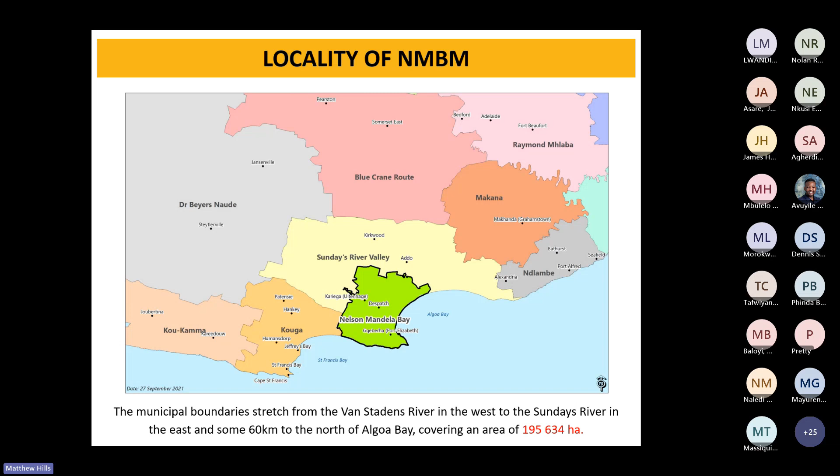Now, looking at PE in particular, we are located near the tail of the Swartkops River, so between Sundays and Gamtoos at the bottom of the screen there. And our water sources, especially our surface water sources, are located to our west. Those are the catchments that we really tap into, the Krom being an important one as well. And what's interesting about PE in particular is it's not just our local water sources that we tap into.

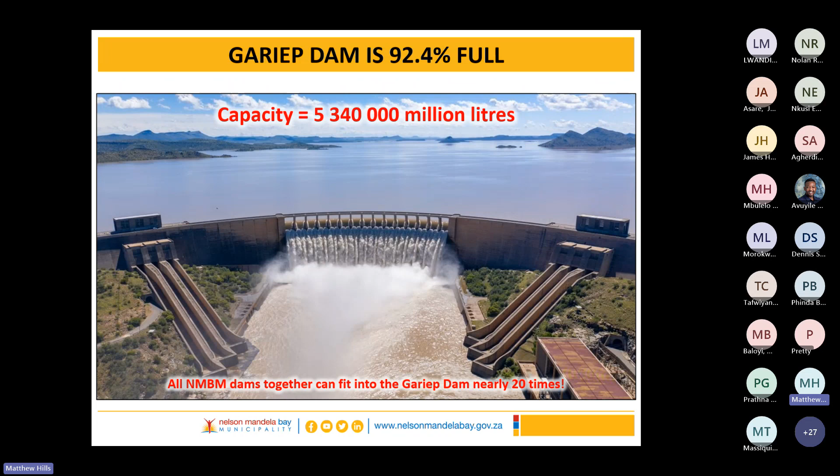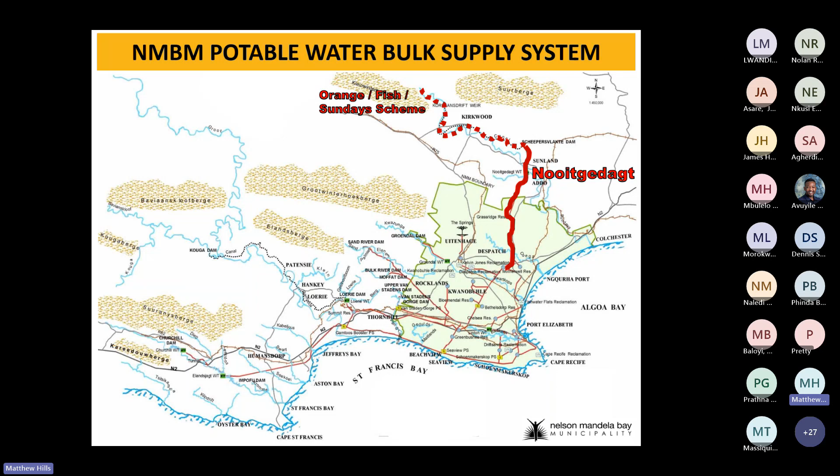So let's talk about the sort of water supply system on a bulk level for the metro. So we've talked at length about the Orange Fish Sunday scheme, and it's at our Nooitgedagt water treatment works, which has also been in the news quite a lot, that about 70% of our water comes into the city during a drought period. The rest of the sources we consider local. So the first is our Sand and Bulk River dams. These are old dams dating back to the 1930s. They were the first large supply dams to the city.

We then have the Groendal Dam, which is just north of Kariega, and its main supply. We then have the Krom system, which includes our Churchill and Impofu dams. That's the largest supply scheme that's dedicated to the NMBM. And then we have the Kouga-Loerie system. The Kouga is the largest dam within our region, but we share that water with the Gamtoos Irrigation Board, a conglomerate of farmers to the west of the NMBM.

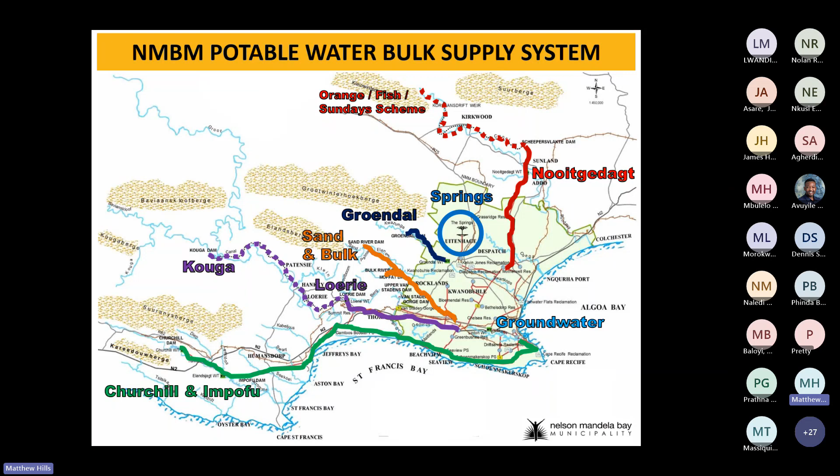We do have access to a spring just north of the town of Kariega. It's actually why the town developed in the first place. It's quite a reliable spring, but its volume's minuscule in comparison to the rest. And most recently, one of my primary projects has been to diversify us into additional groundwater as being part of the supply to the system. So this is at a very high level what it looks like. It's a tremendously interconnected system. So the focal point that I put in was to try and be able to supply areas with multiple sources of water, should one be stressed, we could get from elsewhere. And I will elaborate more on that in this presentation.

So let's focus in on the local dams. These are their capacities. You can see the ones on the right that we own are our small older dams. And most importantly, you can see our biggest by far, the Kouga and Impofu dams, make up most of the storage for our zone. In fact, that makes up 81% of the storage in our supply system. So it's those two dams that when we talk levels and capacities that you really must keep an eye on because they play a huge part in the resilience of our system.

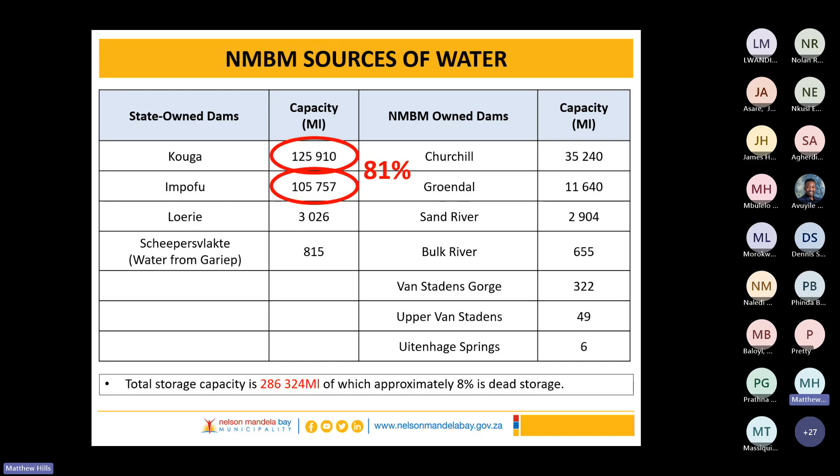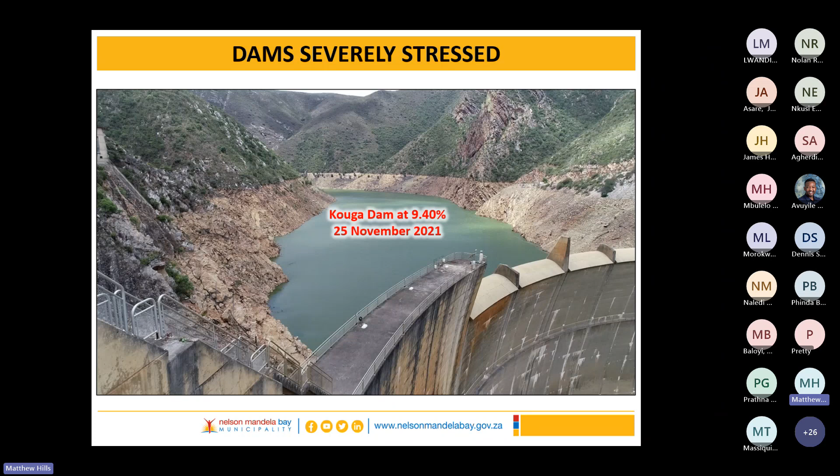Let's see some photos. So we're very lucky at the NMBM. We purchased a drone as survey equipment, and I get the joy of flying it every now and then because I believe a picture tells so much more than a graph with a line across it. So this was Kouga Dam towards the end of 2021. In fact, this got down to 4% in capacity. It was incredible. We haven't seen those levels, especially in the short duration history I've been at the Metro. The Loerie Dam downstream is just a balancing dam, but to see the intake tower exposed was something new for us as well. It offered an opportunity for maintenance, which was great.

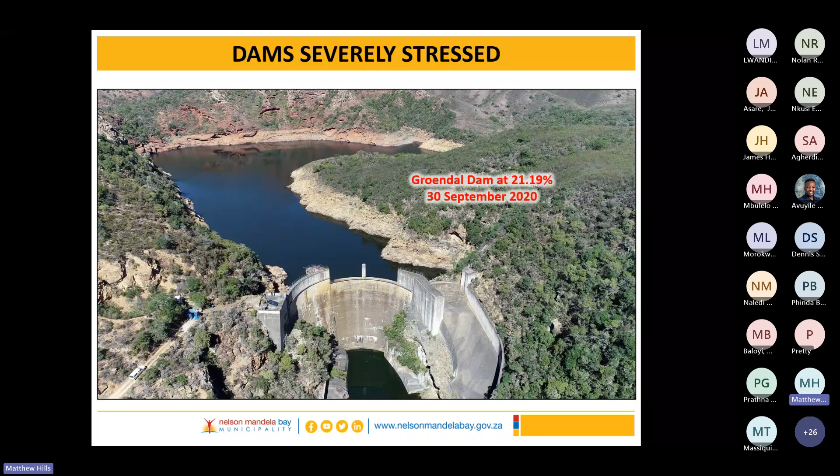Beautiful, beautiful place to go. Also was severely stressed. In fact, this dam did run dry. It reached its dead storage of 7% and was off for about a 5-month period before it started to recover.

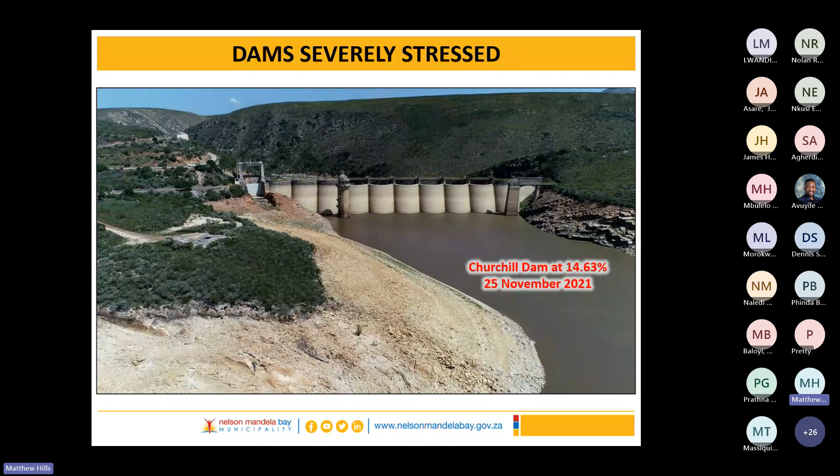And the one that we try and make the most awareness about is the Impofu Dam. And that is because this is, as I said, the largest supply dam dedicated to the NMBM. An interesting part of this photo is it's an earth dam, and you can see the riprap, the stones on the inside of the dam wall.

And we hadn't seen below the riprap line. You can see at the water's edge, there's no longer any riprap. We hadn't seen that since this dam was constructed in 1983. It was quite awe-inspiring to stand there and see.

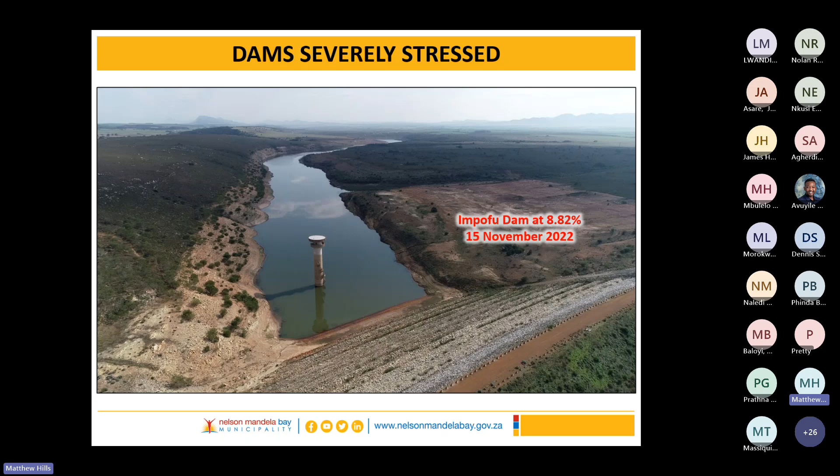You can see where the dead vegetation is. That's what it would look like full. Almost this whole picture would be water, but that's all that was left at the time of this photo.

Right, so we've got some context. Let's talk about some figures. We're engineers after all. So the NMBM experiences cyclical droughts at a local scale, on average about every 7 years. We are unfortunately at sort of the tail end of the cold fronts that make Cape Town's dams fill up, and we kind of get the dead pieces of the thunderstorms that fill up the dams to our east, especially in the KZN region in the Midlands.

So we don't have a reliable rainy period. We actually get rain throughout the year, and some years we just get less than others. So the worst drought we had on record was in the late 80s, and that was before we had water from the Gariep Dam. So it was due to the drought in the late 80s that they brought water from the Gariep Dam. We built Nooitgedacht Phase 1, and that helped us for a number of years with resilience.

But as demand increased, level of service increased, especially in the 2000s, the early 2010s, we started getting more and more dips in the supply system as it wasn't able to keep up with that growth in demand. And what's unique about this drought is, although we anticipated a drought and we were storing up for it and trying to plan for it, the sheer duration of this drought has been unprecedented.

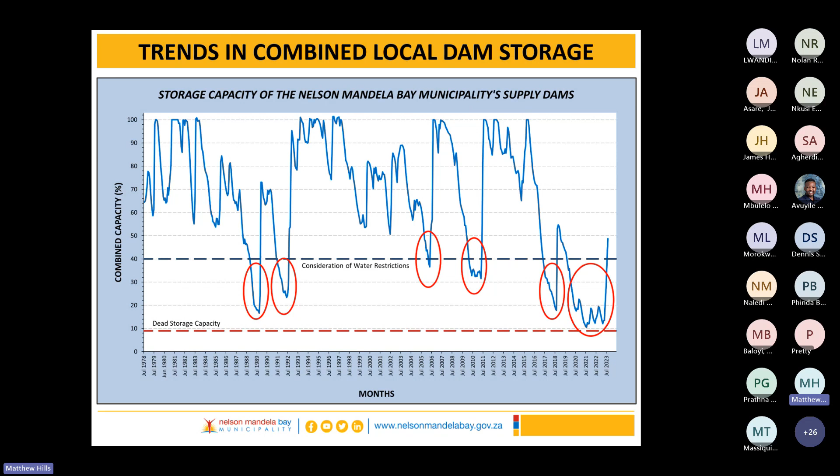If I look at zooming in on dam levels as an average capacity, the dams were last full here in November 2015. That is 8 years ago. It's absolutely unprecedented, and no amount of reasonable planning or investment could have foreseen this event looking back in time. So you can see on this graph, as the dam levels went down, we started imposing restrictions.

We had some relief in September 2018, but since then we had a gradual decline, and basically we were just about managing it for a 3-year period between 20 and 10%. You can also see on this graph that of recent, the last 3 to 4 months, we are very fortunate to have had good rainfall again. Our average dam levels at the end of August were at 48%.

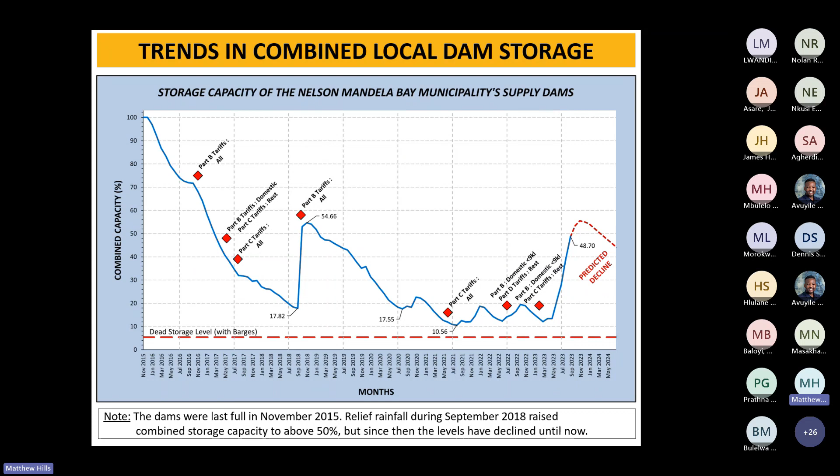We're not out of the woods yet, as they say, but let's just say my stress levels are inversely proportional to the dam levels. So I am in a chipper mood the last few months, and very thankful for the rain that we've received. So if I look in terms of quantities, remembering dead storage, of course, the non-accessible part of the dam, we're currently at an available storage of 43%.

At the bottom of this picture, you can see that our lowest capacity was 9.98. And when you take into account dead storage of 5.4, that meant I actually only had 4.5% volume left in my dams that was accessible. That's how serious the drought got for us. That's how little sleep and extra effort had to be put in just to balance this thing on a knife edge and hope beyond hope that we did not fail. So we came very close to it, but it's looking a lot more positive moving forward.

So let's move forward. What are the predictions going into the future? So I rely on the South African Weather Service. They release a monthly report which shows the indications of what sort of rainfall you can expect over the next 5-month period. Looking at this, it's showing no clear signal. Our dam areas are in white, but in general over the country as a whole, up until December, we're expecting above average rainfall, which is fantastic.

Moving into the summer period, January and beyond, that message will change, as you can see at the bottom right figure, and we'll start moving into a below average rainfall period. So during this period, we're doing all we can to take less from the dams so that they can recover as quickly as possible for the next dry spell.

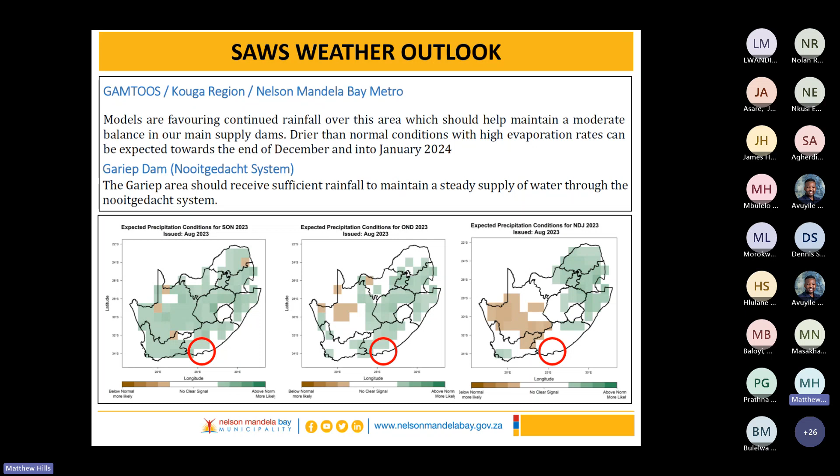I did it on Google Earth just to show that when it rains in PE, I don't get excited, but when it rains in Joubertina or Kareedouw or Haarlem, that side of the country, that's when I start getting excited, because that's where our catchment areas for the dams are. And we really need an event where we get 50 mils or more in 24 hours to saturate the ground, create that runoff that then gets caught in the dams.

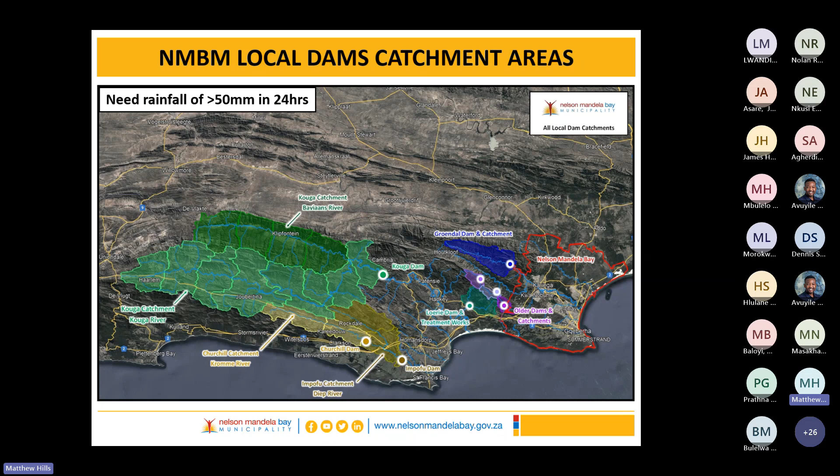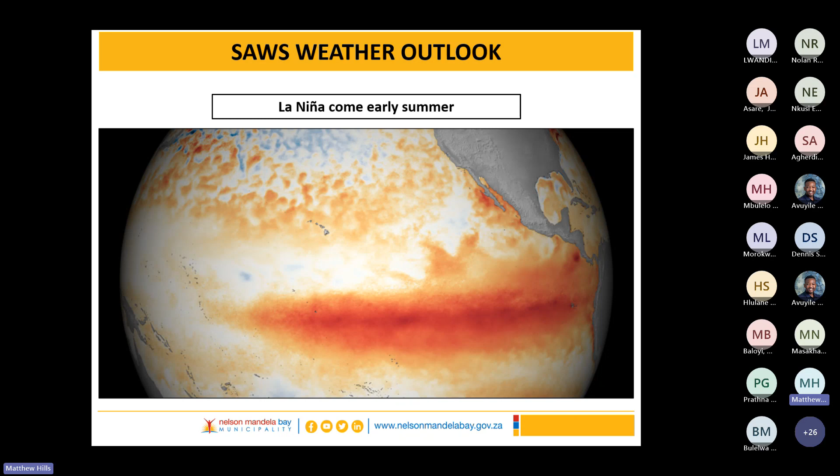And moving even further forward, into January, February, March next year, our concern is that a La Nina event is predicted. And once that kicks into place, the impact on the Southern African weather system is a below average rainfall period. So the focus must be on preparing for this next low rainfall event and making it through that as well. So, like I said, feeling happier, but foot is definitely not off the gas just yet.

Again, let's go even more technical. This is the audience I'm presenting to. Let's talk in volume. So how it works is, as a municipality, we purchase a water license from the Department of Water and Sanitation. We make a request saying this is the volume we need. They look at the resource, what it can produce, what's already committed to other users, and then they decide whether or not we can buy that water use license.

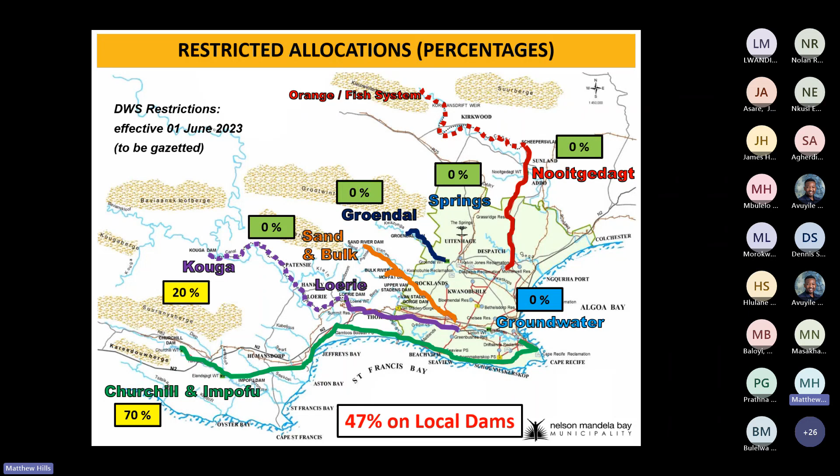Looking at the restrictions moving forward, they've relaxed dramatically over our Sand & Bulk-Groendal region, where they were also quite strict at a stage. But basically, the net is only half the water I can get from my local dams I'm allowed to take moving forward. Here's the volumes we're looking at. It's looking much more positive than it did. At a stage, DWS were restricting me to 280 million liters a day. I'm now up to 324, which is much more manageable. I've also brought groundwater online. You can see 18 megs a day initially under our licenses, so that's looking positive.

But what I had to plan for was this. Before groundwater came on, what if Churchill and Impofu and Kouga failed, because they were ever so near to that happening? I would only have 224 million liters a day I could take from the system, and demand would by far exceed that. So how were we going to address that?

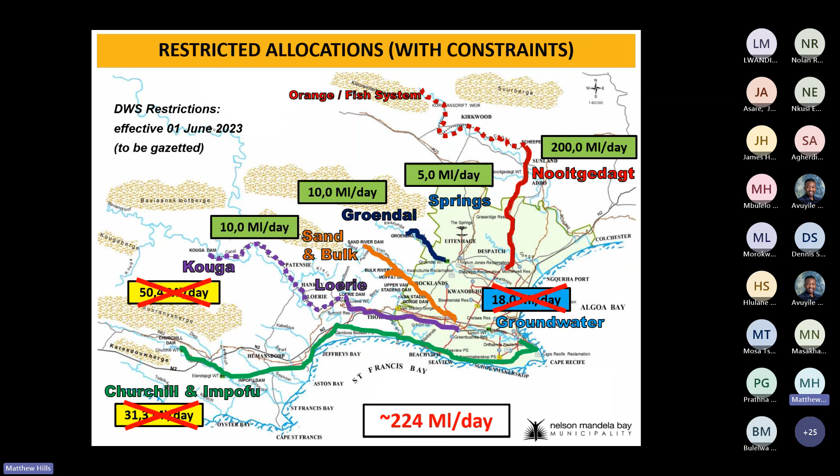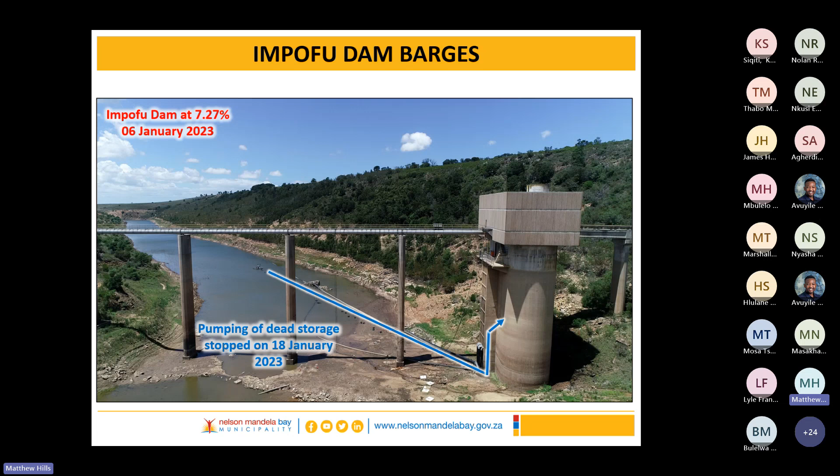So what we did is we quickly built together a floating platform or a barge, pumps, motors, a transformer for power systems, some electronic controls, and we basically floated that out deeper and deeper down towards the dam wall to suck water, dead storage out of this system and put it in the intake tower. This helped us dramatically. It did mean that we were tapping into dead storage, which would hamper the ability to recover, but some water in terms of constitutional human rights is better than nothing. So we had no choice. This was one of our interventions.

The other core focus was the Gariep dam system. Now, the Gariep was full. It had plenty of capacity. How can we bring more of that water into areas traditionally supplied by the local dams to offset that water usage, right? So we first looked at upgrading the water treatment works, starting at the top, phase 3. So that's bringing on additional capacity. And while that was happening, we built a temporary treatment works, which I'll show you next, so that we could have capacity while that was under construction and then decommission once we handed over to phase 3.

But it's no good just producing more water. You can produce all the water you want at the works. If you can't move it to a tap, it's just going to overflow at the works. So the transfer system, the booster pump stations and the new pump station in green were all about taking that water to the taps and creating the demand from that treatment works, interconnecting pipe work to other zones as well, and expanding those zones became critical to this additional supply from the Gariep Dam.

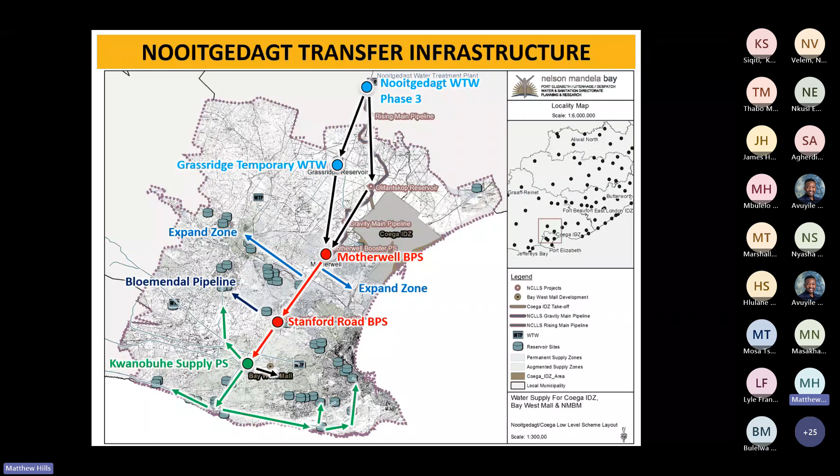So this is Grassridge. We won an award for this. We were very proud. It's a reservoir. So what we did is we converted it into a settling tank, essentially.

Raw water came in. We reconfigured the pumps at Nooitgedagt for one set to pump raw water. It comes in at the right-hand side there in green. It goes through a mixer with a sheet of plastic to sort of separate that zone, and it's dosed with its flocculant and coagulant, creating this mix, hopefully for good floc development.

And as it flows along the long direction towards the end of the reservoir where the outlet is, you can imagine looking at it from side on, all the heavy particles will slowly settle down towards the bottom along that length. So the outlet we reconfigured not to suck from the bottom, but from the top where the clear water would be. We added some chlorine, and that's how we brought a temporary water treatment works online.

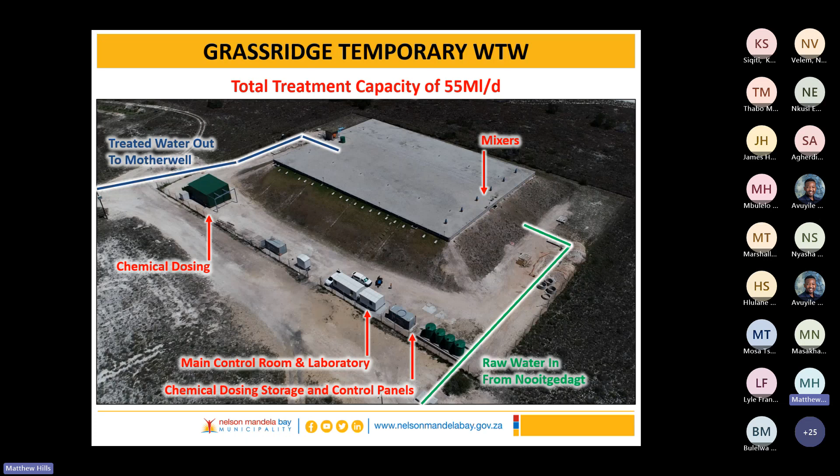We then upgraded the Nooitgedagt treatment works. So each phase is 70 million liters a day. Phase 3 was constructed, so that brought us up to 210, and then we could decommission Grassridge. So you have 70% of the water supply to the city coming from this facility alone. Here's just one or two photos.

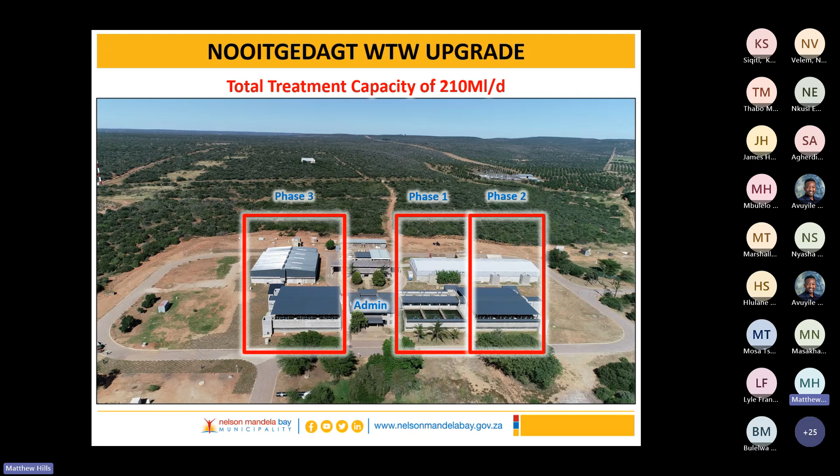So it's strainer, mixer, settling tank, and filters, chemical dosing, and we have backwash recovery, settling, backwash recovery, and then the large high lift and low lift pump stations to then move that water into the city. See, unlike Cape Town, where most of its dams and treatment works are in the mountains, so they've got gravity basically to bring it into their network, the NMBM is rather flat. So a lot of our water supply is through pump schemes to get it into large bulk reservoirs and into the network.

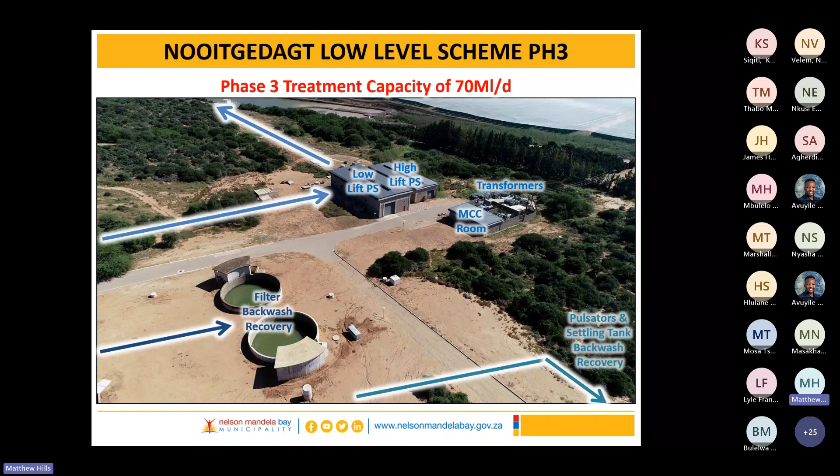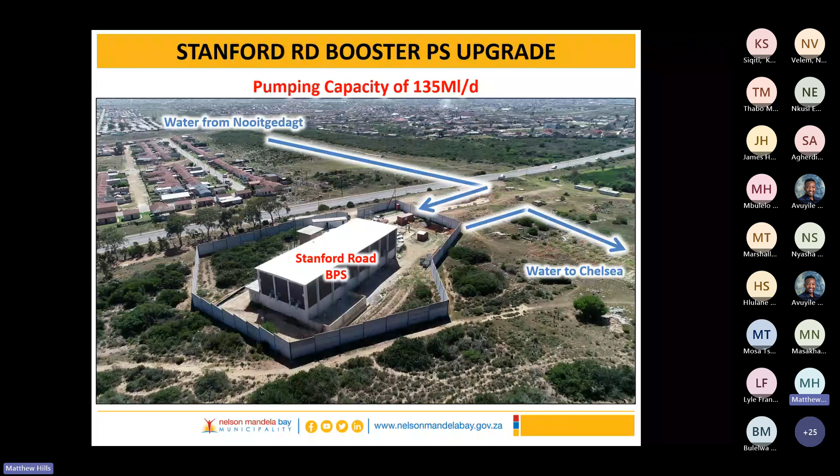Moving further down the Nooitgedagt transfer scheme, I'm currently underway with upgrading of the Motherwell booster pump station by adding an additional pump set. I'm also currently upgrading Stanford Road pump station. Those two are due to end in November this year, and this will help bring even more water from Nooitgedagt across to the southern and western region.

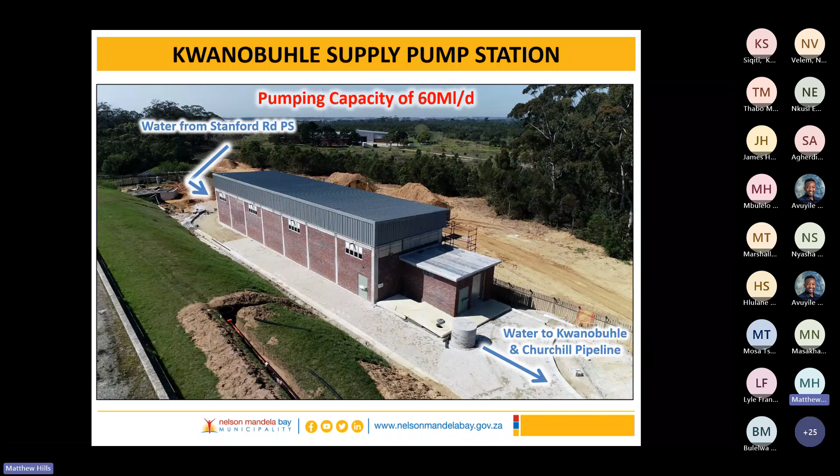Then a new pump station had to be constructed called the KwaNobuhle Supply Pump Station, and this is the final step in getting that water over the watershed to those stressed areas. There's some interconnecting pipework that was also constructed.

I see one of my colleagues, Lyle, has joined the meeting. This was one of his projects.

So to get areas that relied on the local dams on this transfer scheme as well, such as KwaNobuhle.

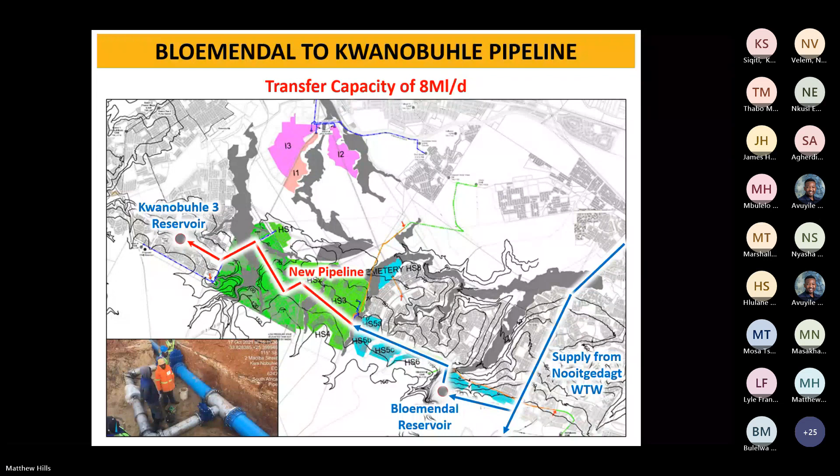The third important element of our supply system augmentation was groundwater. So I'm quite passionate about groundwater, and anyone who knows me knows this about me. What I see the value in it is if you have those resources within your zone, you can diversify your water mix. During periods of dry, you can tap into these more and rely on them. And during periods of plenty, perhaps you could even recharge them with excess dam water and build up those aquifers again.

And groundwater, it's never where you want it. That's something you're going to learn. You know, at a house, when a driller comes, he drills in the driveway because that's where his drill rig can access. When you're looking at water for a municipal scale, you have to look at the geology, you have to look at the hydrogeology, and you have to look where there would be large volumes of water.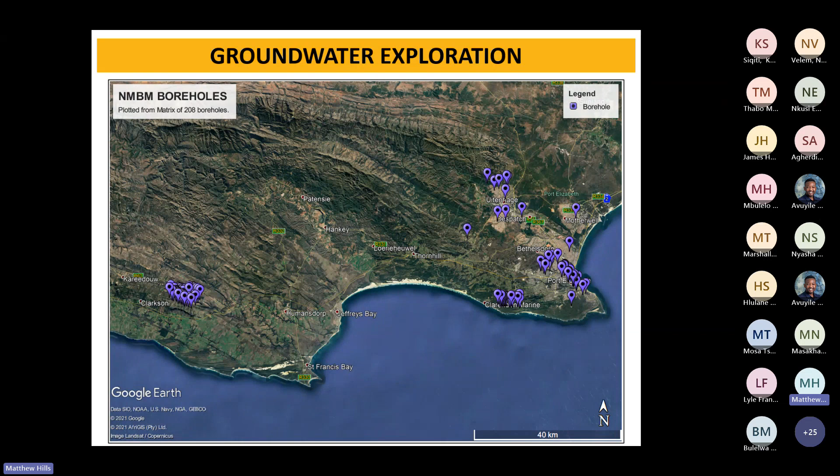We've been in the IMESA magazine as the cover photo for that. That was a nice highlight for us. We also were on Morning Live during Water Week. We had a live handover and about a 45-minute tour of the plant.

The water that comes to this plant is artesian, so it comes out the ground on its own. It's full of iron and manganese, and we're using a breakthrough technology where we're using bacteria to act as a catalyst to help us remove those minerals. And interestingly enough, the water comes out at about 27 degrees C, so it's quite warm. We actually have to let it run through the plant to cool down before we put it into the system.

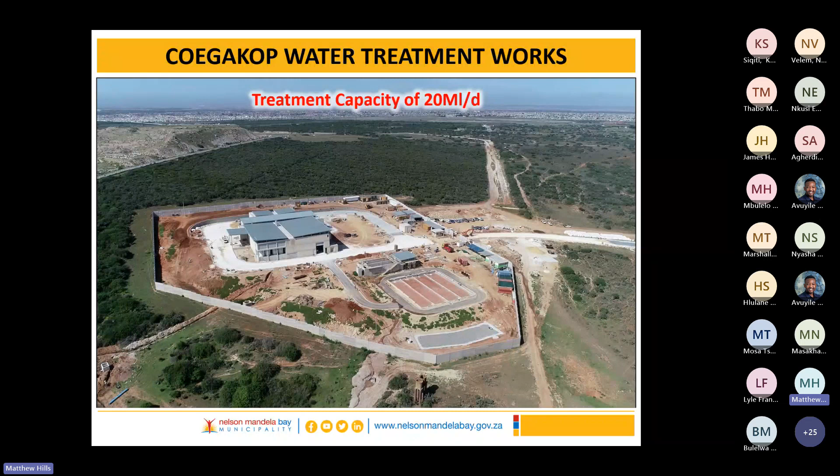The second is the Bushy Park wellfield. This gives about 10 megs a day, and we inject this water into the same pipeline that comes from the local dam. So every liter we put in here is one less we take from the local dams themselves. We then have three smaller ones called the Moregrove wellfields. They comprise of Fairview, Port Nottingham, and Glendinning, combined about 5 million liters a day.

They only supplement reservoirs. So we actually blend the water. It's not 100% SANS compliant, very, very close. But when it's blended at a ratio of 20% groundwater to 80% surface water, we are well within tolerance. So we abstract, disinfect, put it in the reservoir, and again, it's another liter less from the dams.

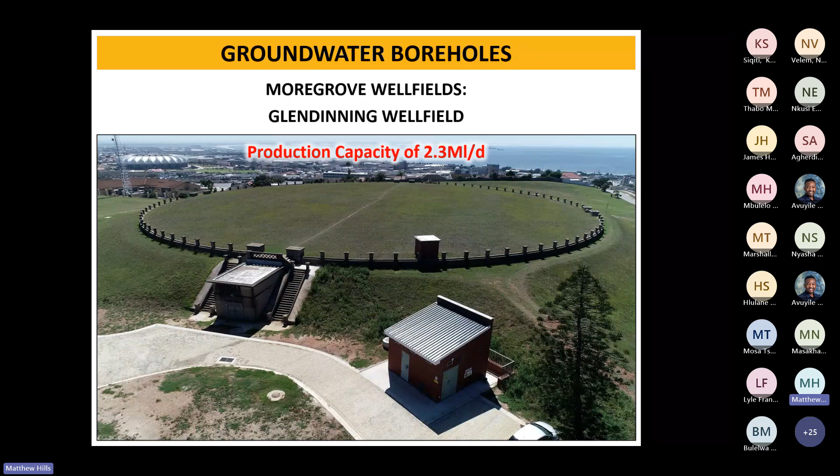The last big groundwater project, and the one that we're really here for today to discuss, is the St. George's Park wellfield. This is just a teaser slide. I've got a section on that, and we'll go through some of the really cool engineering problems that we had encountered and how we solved them a little later.

So, you take a break. I hope I still have your interest and you're still being attentive.

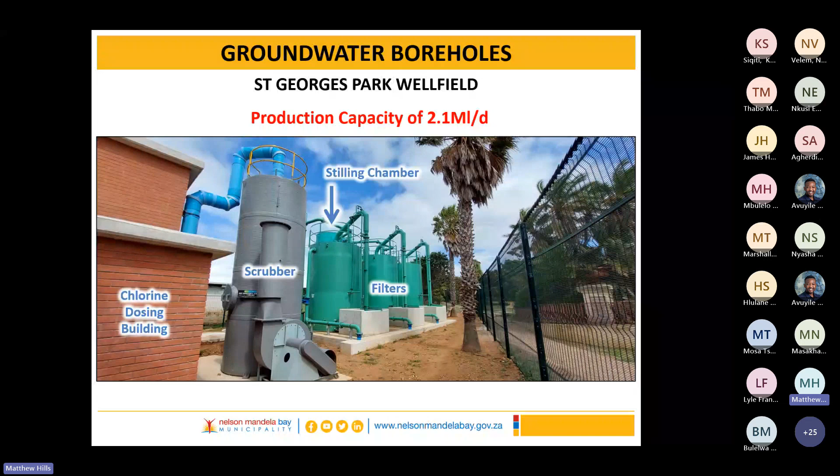It wouldn't be an NMBM drought presentation if I didn't also focus on the second focal point of our drought plan, which is water conservation and water demand management. It's where we get the most critique, the most public feedback, and the most ideas as well. So I'm going to give you a very quick and high-level overview of some of the key measures we've been undertaking. But make no mistake, this is not everything. This is just some of the bigger stuff that we've been focusing on.

We do have a 15 workstream focal plan to improve our non-revenue water, or decrease it perhaps is the better word. Remember, non-revenue water is just the difference between what comes out of your treatment works and what's billed to your consumers. It could be lost through leaks. It could be simply unbilled, or the meter could have stopped reading, or it could be illegal connections. There are many things that could cause that difference. You know, real losses, apparent losses, or unbilled consumption.

So when you hear a non-revenue water figure, just know it's more related to the billing system than how much water is lost. I mean, think about it. If water losses are quoted at 30%, every third street I would drive down in our city, I should see water running down the road. It's just simply not true. A lot of it relates to how much is actually being measured at the consumer. And if we focused on fixing that, our value would decrease. But I digress. Let's focus on what we did.

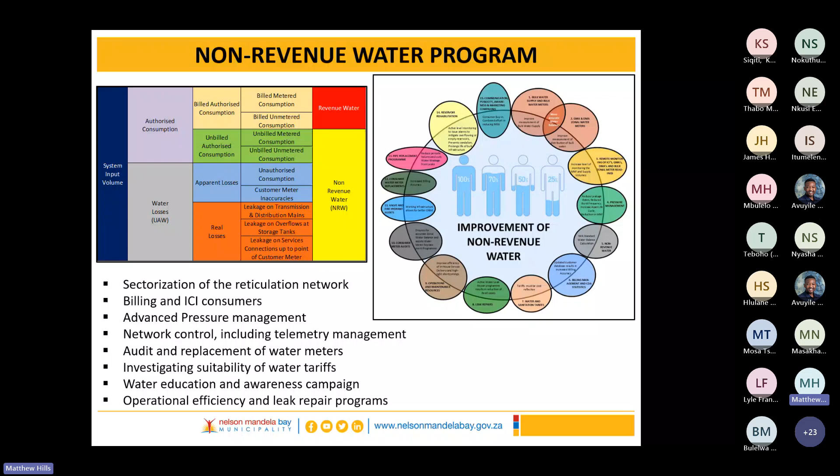A huge drive for leak repairs. We are repairing about 1,200 leaks a week. It is immense. And to understand the scale of what we're dealing with, I love this. I put this together a while ago.

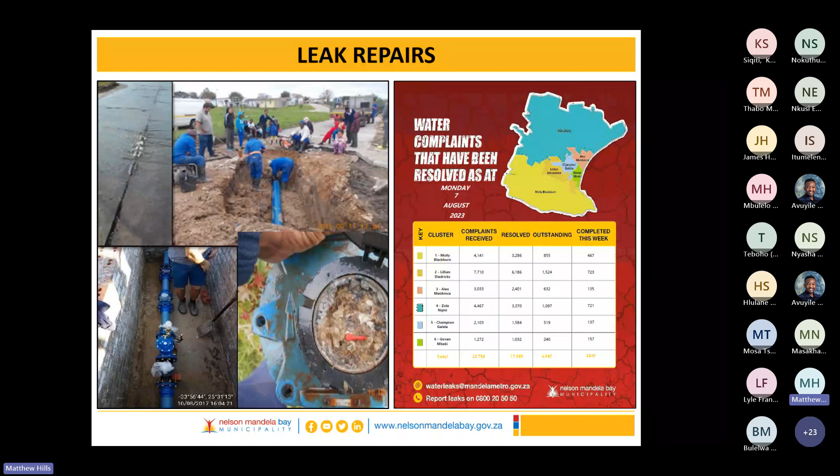If you look at South Africa as a whole, and you look at our perimeter, our borders, essentially, with the ocean, with our neighbors, Namibia, Botswana, Zimbabwe, Mozambique, and Eswatini, the total perimeter amounts to about 6,700 kilometers. It's a huge area. I mean, our military and our navy struggle to manage those borders.

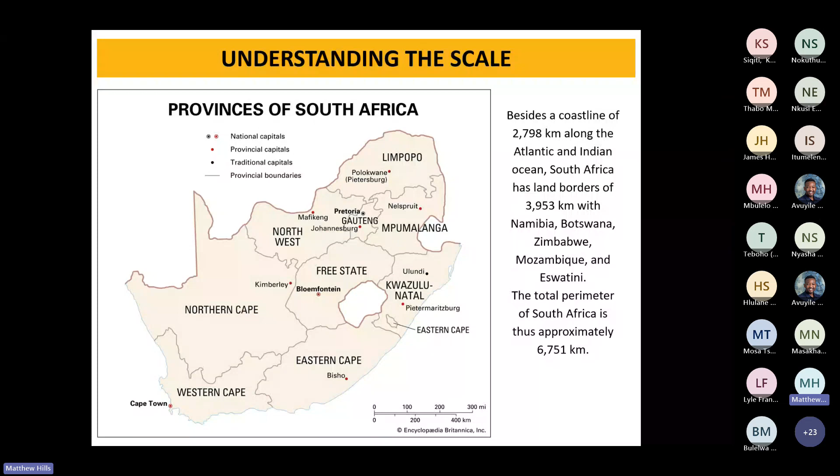And in comparison, if you take all the water pipelines throughout the NMBM and you lay them end to end, bulk distribution lines, all of them, they would go 80% around this perimeter. How incredible is that? That is the scale of infrastructure we're dealing with. So when you have 4 depots with a few plumbers each and a couple contractors with their teams, this is the scale of the infrastructure that you're dealing with when it comes to water pipelines, just for a little municipality. And we are by far not the largest.

So understanding the scale is very important when it comes to understanding response times and available resources to reduce the backlog in leaks. Another intervention is we're doing district metered areas, DMAs, as well, where basically, for example, the water going into a suburb: how much went into the suburb, how much was billed in the suburb, which suburb has the biggest difference. Let's focus our efforts there to find out where that missing water is going. And we're doing that also remotely.

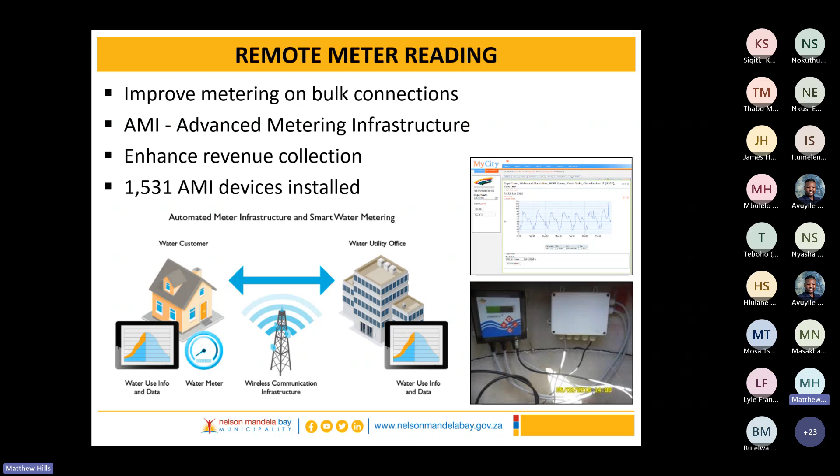So those signals, those flow rates and pressures, are being sent to our head office so we can interrogate them and pick up anomalies, especially night flow, which is an indication of wasted water. We also reduced the pressure tremendously, down to 1.5 bar in critical zones. This was one of the great initiatives done by City of Cape Town.

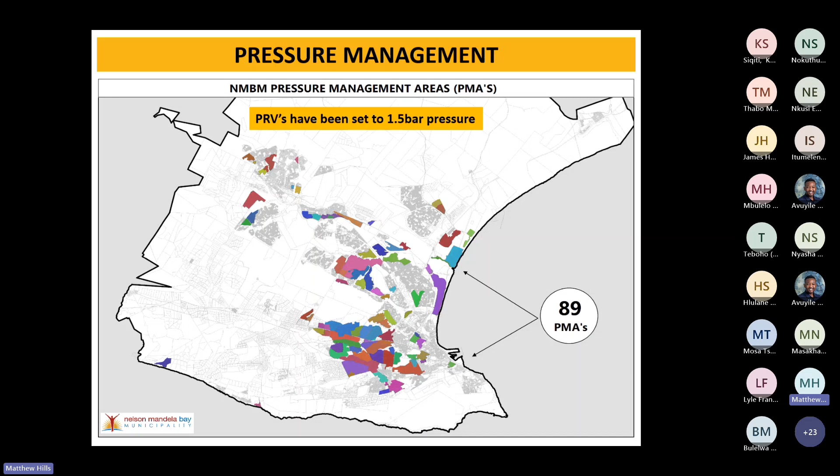Less pressure means when you run your tap, less water comes out, is one, so less wastage. But two, when you have leaks, there's less loss due to a leak because there's less pressure to force it through that leak. So 89 pressure management areas currently, and that list is just growing and growing.

When we have abuse at a household level, we can then look at installing our flow limiting meters and our flow limiting discs. So a flow limiting meter will let a certain volume through it from 5 a.m. And if you hit that limit, it will stop water supply until 5 a.m. the next day when it starts up again. We don't set them very tightly. We set them to avoid abuse. If a property is using more than 500 liters a day, it is excessive.

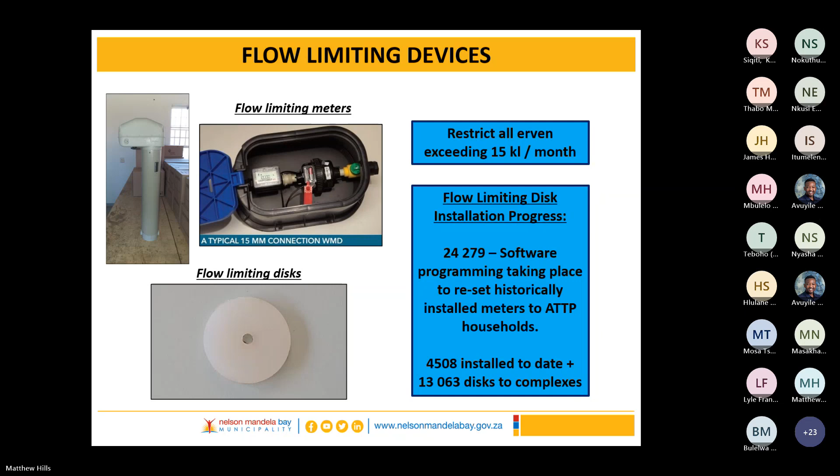And how you can measure yourself is you look at how many people are in your household. So if you're a household of 4 and our target is 50 liters per person per day, over the course of a month, your municipal bill should read 6 kiloliters. If you're above that, you're a problem. If you're below that, you're part of the solution. And we're trying to give the public measurable ways to see, are they on track? And if not, give them advice on what they can do to get themselves on target.

So there's a lot of campaigning. We've targeted the schools, and the churches as well. There's nothing better than your kid telling you, stop using water, you're wasting, mommy. So we've tried to bring this into social culture in a way.

And on our website and also Algoa FM and our local radio stations, every day the dam levels are quoted. This is updated daily so you can see exactly how we're performing, and there are measurable things you can use to say, are we there? In this case, we're 10 megs a day over target. We're not there. We need to do more.

And a lot of the communication side has been, I can't force someone to do something, but I can show them the consequences of not doing anything. So if we didn't do anything, this could become our reality. And that was well received. It did actually bring it into the public context. What if it did happen, though?

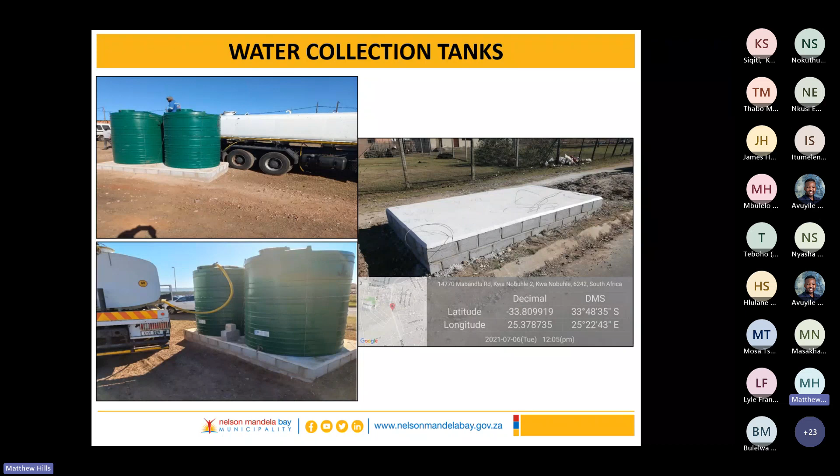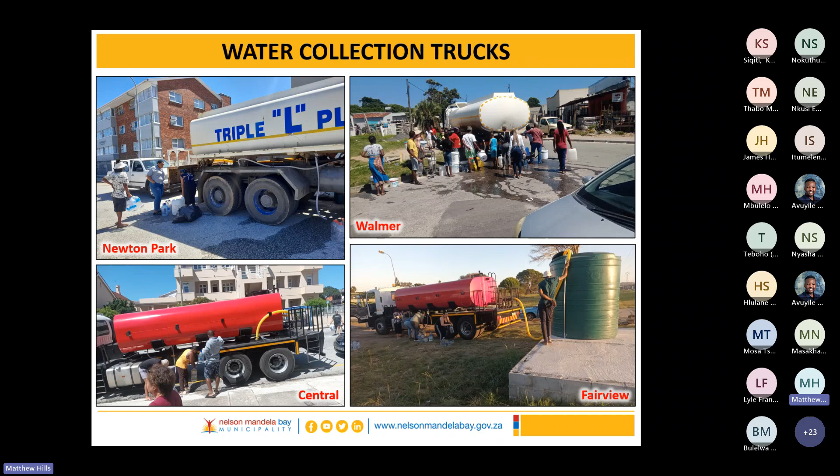What do we do? We'd installed tanks on platforms throughout the city that we could fill up with water trucks. But how practical really is that for a whole community to go to these collection points? Some areas where we couldn't do that, there would have to be a mobile truck sitting and waiting while people collect. And there are only so many water trucks throughout a city that could be made available and service so many individuals.

We had tried the concept of water collection points where essentially we would shut off the supply to a suburb, but just before that shut-off valve, we would establish a collection point where people could come and collect. So the water that you could carry is what you could use, very much like a standpipe system, taking off reticulation to the household and moving on to a centralized standpipe collection system. But these were last resorts, and I don't think any person would be happy with this level of service as a standard for a metro. So we had to prepare, but we didn't want this to become a reality.

And now I think I've given you context. Remember, we're in engineering. What's the first step? Is to define the problem. I think I've given you enough information and background to understand it. The problem is we relied on local surface water sources and they experienced a low rainfall period for an extended period of time. So what were the solutions?

A lot of them have been shown to you. St. George's Park Wellfield is just one of those, but we need to go into detail into one of them, and this is the one that sparked a lot of interest. So this is the one I'm going to show you today. To give a bit of background to this project, this didn't start as a knee-jerk reaction to the drought.

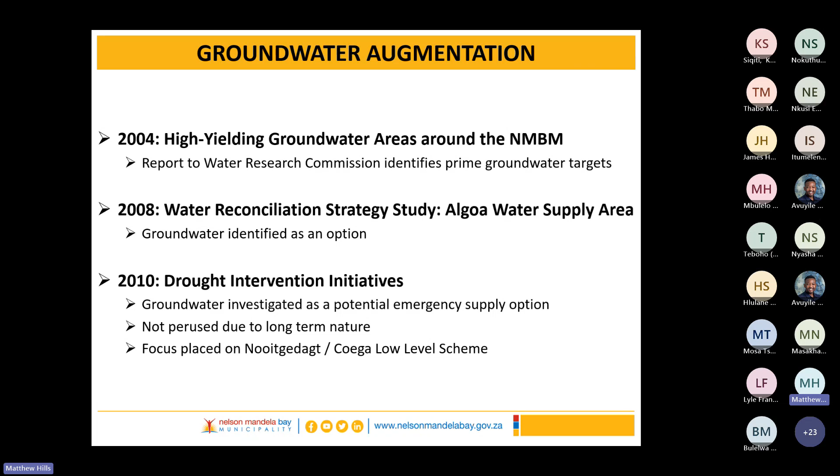We've been looking into groundwater since 2004 when the Water Research Commission and us worked together looking at what potential there would be in the NMBM and surrounds. It was brought into our reconciliation strategy in 2008, and during our minor drought of 2010, we actually commenced with work on some of those sites, looking into what the potential would be. So when it came to these augmentation schemes, Coegakop we started in 2012 with our exploration.

In 2018, I received a special grant of 97 million, called a municipal disaster grant, to explore these other areas, one of them being St. George's. I recognized that as a metro, we had very little experience with groundwater. So I chose 7 public pools, sports fields, stadiums, etc., to be our pilot projects, taking them off the drinking water system and putting them onto groundwater or non-potable water, so that we could learn what control systems we would need, what structures would be best suited.

And we did different ones at each of these 7 to learn from it, so that when it came time to investing in this multi-million rand infrastructure, I mean, Coegakop itself is 450 million rand, we would know what we were doing, or at least have some experience. So really during 2020 and 2021, that's when things heated up. We got the funding to go ahead with the construction of the treatment works, pump stations, and general borehole equipping infrastructure required. St. George's Park in particular commenced with construction in July 2021 with an approximate value of 55 million for construction.

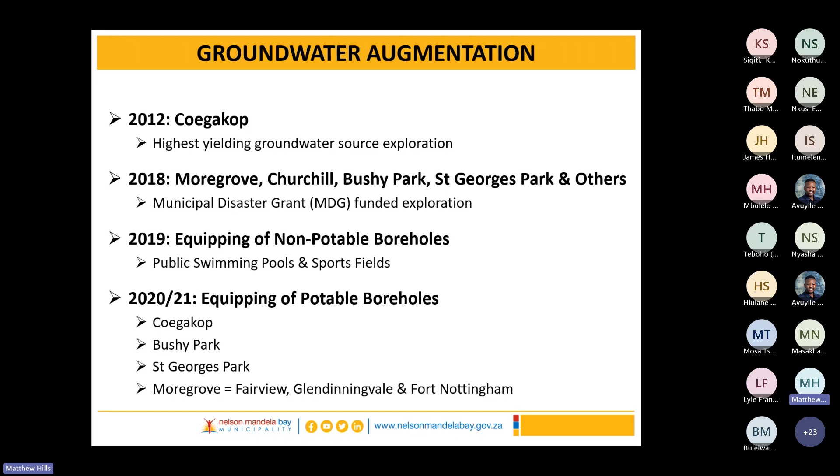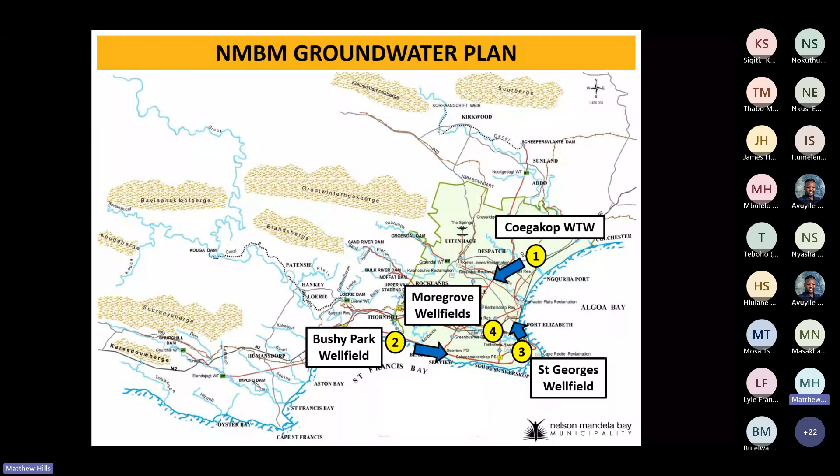So here's the groundwater plans phase 1. These well fields to be brought online. You'll see, thankfully, a lot of them are in the southern and western zone, which is fantastic, because that's exactly where I needed the water, and they would then augment these local sources. You'll see, though, number 4 and number 3 are kind of along a line, and they are. They're along one of the fault lines called the Moregrove fault line. The Coegakop is along the Groot-Winterhoek fault zone. That's an awesome fault. It's artesian. And Bushy Park has its own fault system that runs through that farm. But we're going to focus on the Moregrove fault.

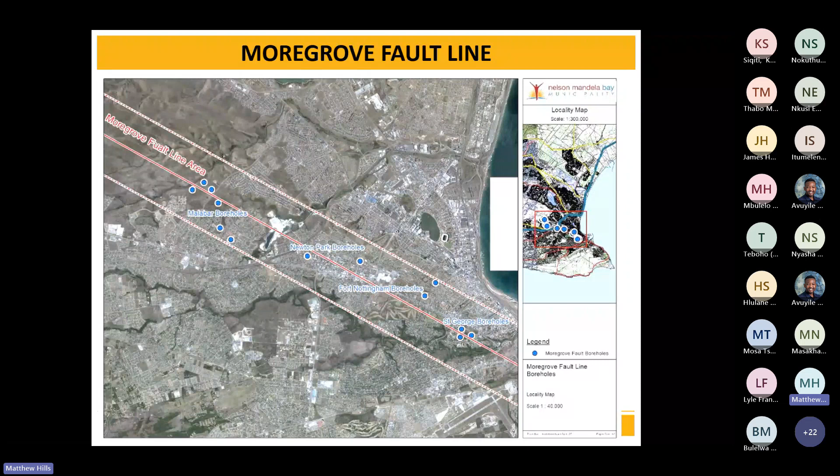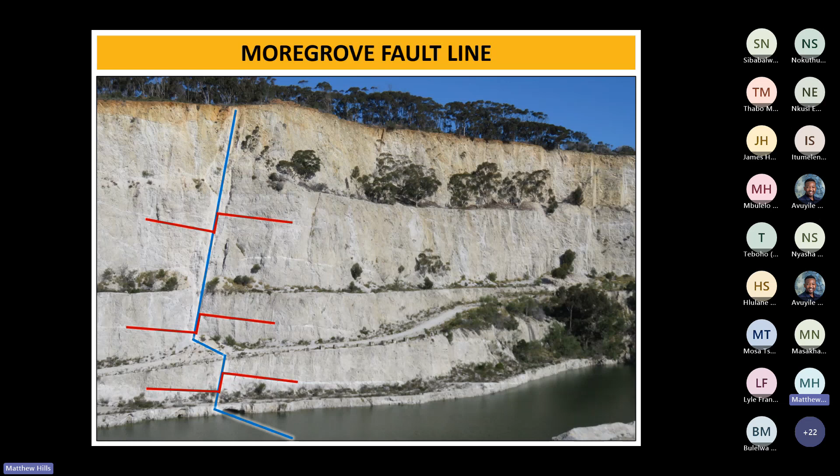The NMBM city center area is a lot lower than our southern and western zone. That is because of this fault. It subsided on the hanging wall. The hanging wall is towards our CBD area, and the footwall stayed firm. So a whole section geologically sunk. And it's at this interface that we really look for large groundwater resources, because rock is like a sponge. Imagine 2 sponges, a soft sponge and a really, really dense sponge.

If you put them in water and put a straw in them and try and suck out the really dense sponge, it's hard to get the water out and it doesn't hold much water. But the soft sponge is much easier to suck the water out and it holds a lot. It's at these interfaces that you have a lower density and you have more transmissivity to be able to move that water through those cracks. That's what we were targeting.

We were looking, where are the major fault lines throughout the city, be they folding faults or be they slip faults or normal faults like this. That's where our high groundwater resources were targeted. So let's focus back into St. George's. So we know we're on the Moregrove fault. So what are we going to do with this water?

I have a reservoir in St. George's Park, nicely named St. George's Park Reservoir. It's the 2nd oldest reservoir in the city. It was built in 1907. It is a heritage site. There's war memorials on top of it and a little garden that you can see as well. So it's a protected piece of infrastructure.

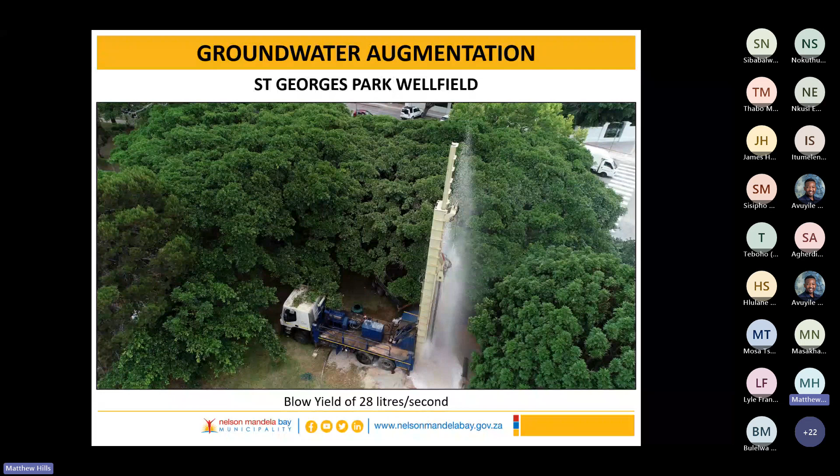When you drill boreholes, drill a small hole first and see what you find. Look at the rock coming out. Every meter, take a sample, build a sample garden so you can see the rocks. You can see if there's a change in interface. You can see if there's staining on the rocks. If the rock is stained, it means that minerals have flowed past it and deposited oxides or other minerals on top of it. And that's an indication of groundwater.

So explore first, then go, okay, where the good strikes are, drill them out bigger so that you can put the equipment you need in to get that water out. The exploration holes we drill are typically about 200 meters in this sort of area. Our production boreholes were 310 meters plus. Not our deepest, but in order to get to the large aquifer, we had to go down about 300 meters here.

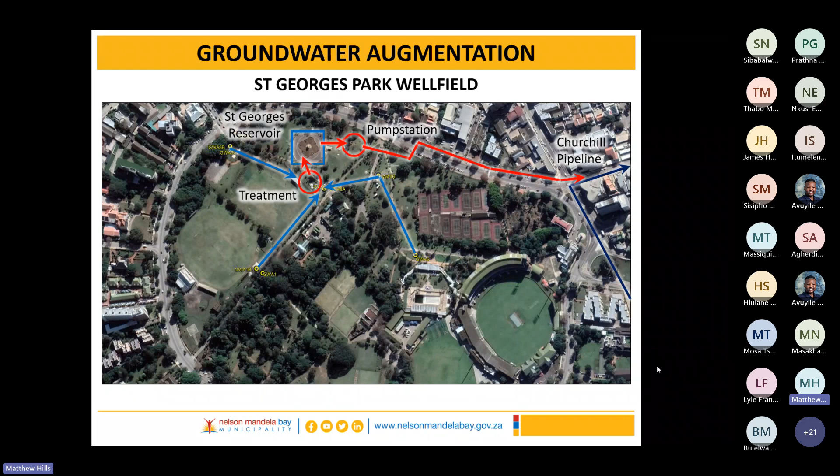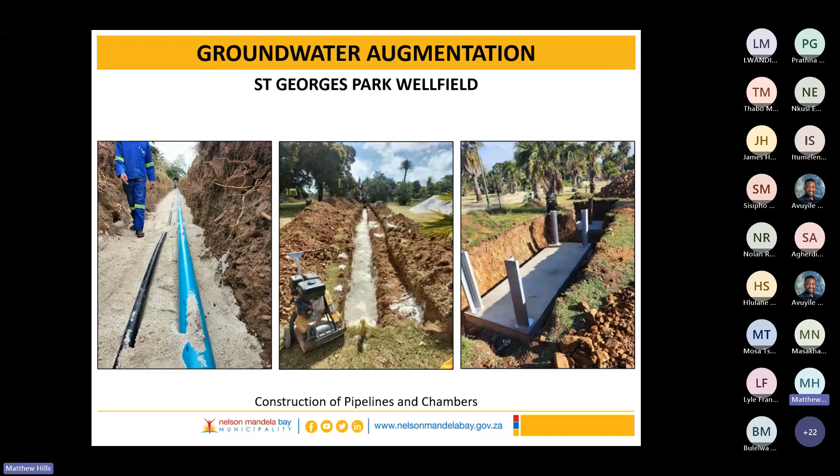Another thing we chose to do is the borehole itself is in its own chamber. And the equipment for the mechanical controls and sensors are in the large rectangular chamber. So if I ever need to work on the hole again and blow it out or repair it, I'm not going to flood my equipment. Separate the two. That is very important. And we learned that from the pilot projects.

The treatment work side, we needed to build a filtration system. So this water had a little bit of metals in, a bit of iron, not much, a bit of copper, bits and bobs, that needed to be oxidized out. And the reason why we had to oxidize them out was this resource was going to be the sole supply for the reservoir. So there was no blending. If you were slightly out of spec, you could just blend with surface water. This was going to be a sole supply system. So it was imperative that we were SANS 241 compliant 100% 24/7.

And we did that because we didn't have a lot of extra teams that we could use to run these systems. It had to be as automated and simple as possible. That was our target. In order to create the oxidizing reaction, just before these filters, we inject a little bit of chlorine that oxidizes the minerals so that they become precipitated and can get caught in the sand media filter. And then after the filters, we dose a little bit more chlorine for disinfection and residual disinfection purposes.

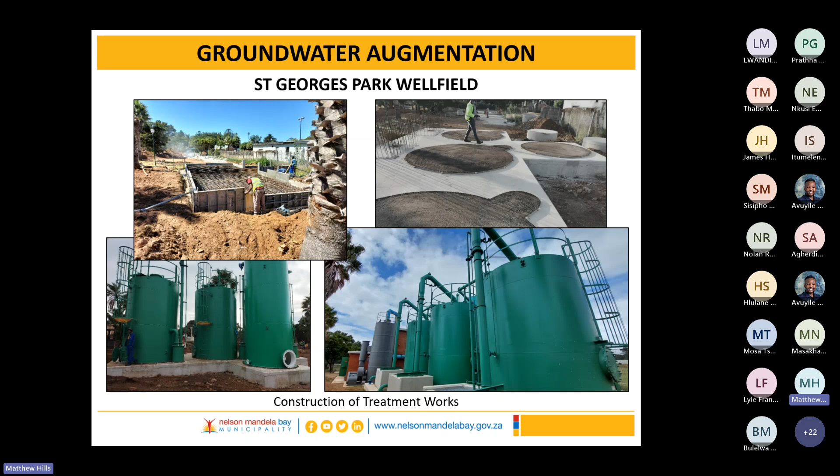One of the advices I can give you working in government is know your resources. There is no point building a Mercedes treatment works if you don't have the people and the skills to run it. If you are in the middle of the Karoo and you have very limited personnel and you're trying to do a wastewater treatment works, do sludge lagoons, do sludge ponds and oxidizing ponds. Don't do a full CAS system. The expertise on the electrical, electronic, and mechanical equipment aren't there.

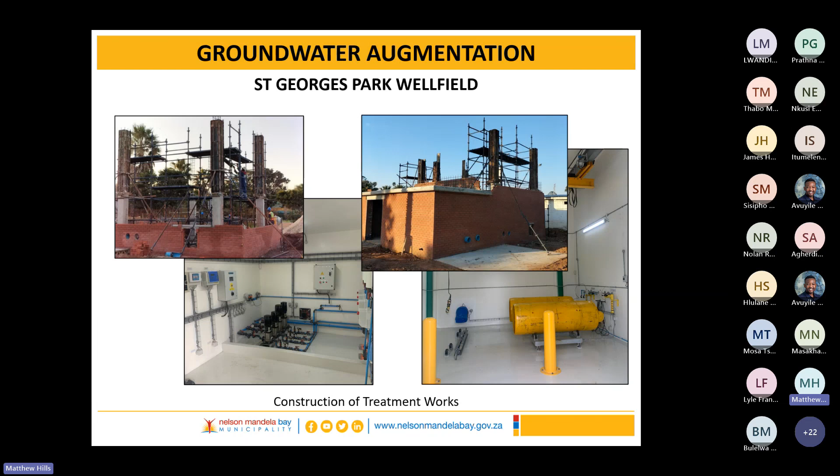So for this reason, we chose chlorine gas, and a huge amount of effort was made into ensuring that it was safe. A sealed building that automatically seals, a diffuser that if one of the 4 sensors picks up gas, will pump all that air through a neutralizing media and keep the thing safe. Backup power supply and UPSs. You can go gas in town. You just have to be very attentive to detail when it comes to making sure it's safe.

And then the other major component was the pump station. So this is any excess water that's created, not used by the zone, can go to other zones. And here we are building it. 2 pumps. Always when you build a pump station, leave an extra bay. One day you may need a 3rd pump. You're only going to build the structure once, so always leave an extra plinth spare for future expansion.

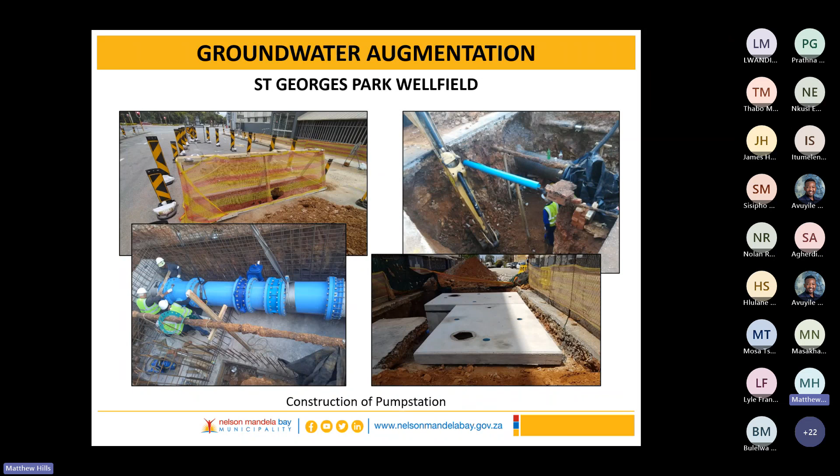The last piece of construction, probably the most complicated, was where this pump station tied into the existing bulk line. It was in our CBD area with lots of existing services, but through careful planning and project management, we made it go without a hitch or damaging anything. You wouldn't even know the structure's there driving past it today.

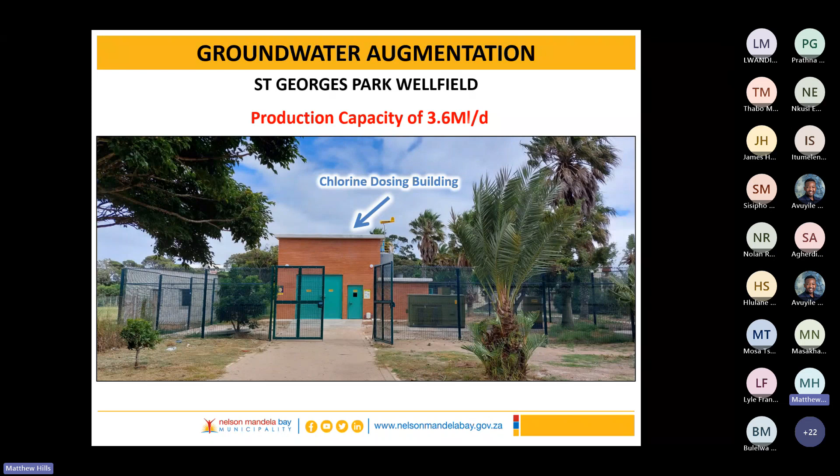Being in the CBD, there is a theft and vandalism issue, so we have a full camera system, clear view fence, the works. It's built like Fort Knox. That's the chlorine scrubber I mentioned - if any gas is detected, all air is put through that media.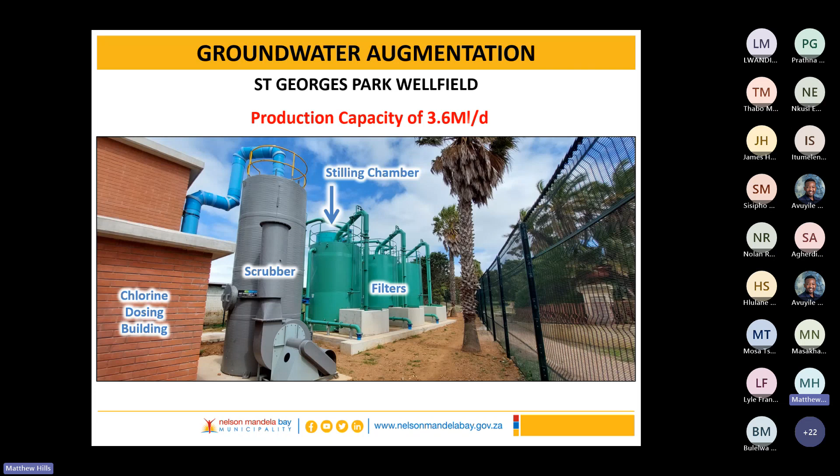And there's the pump station upon its completion. Just look at the structure - some of the things I went through to prevent theft and vandalism.

It's a double wall with a cavity, and that cavity is full of concrete. So if they start removing bricks trying to get through, they're just going to hit a concrete slab. The roof is solid concrete with no gutters, because they climb up those - rather have a large apron and manage your stormwater runoff onto the apron.

The doors are basically from a safe. The ventilation was made narrow so it's hard for someone to climb through, and it's cast into the concrete between the cavity - nothing really within arm's reach. After this, cameras went on at a high level as well.

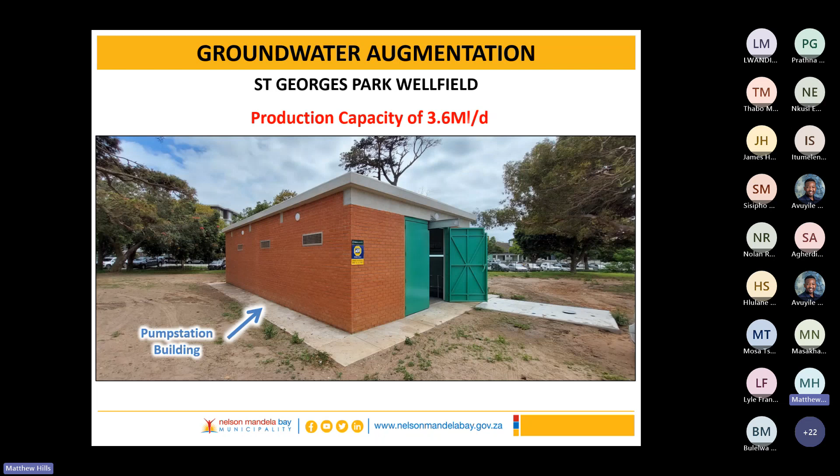So know your area. Design not just for the technical solution now, but for the 20 or 30 years that this thing will have to be there and operated. An operator-centric approach to design is one of the best pieces of advice I can give you as a consulting engineer. Imagine you had to run this thing for 30 years - how are you going to protect it, and how are you going to make life simple?

So, a massive success. We launched on the 14th of March and have been running this plant since the 1st of March, averaging about 2.6 megs a day. We don't want to stress the aquifer at this stage, and we're trying to get the news out about all these positive projects.

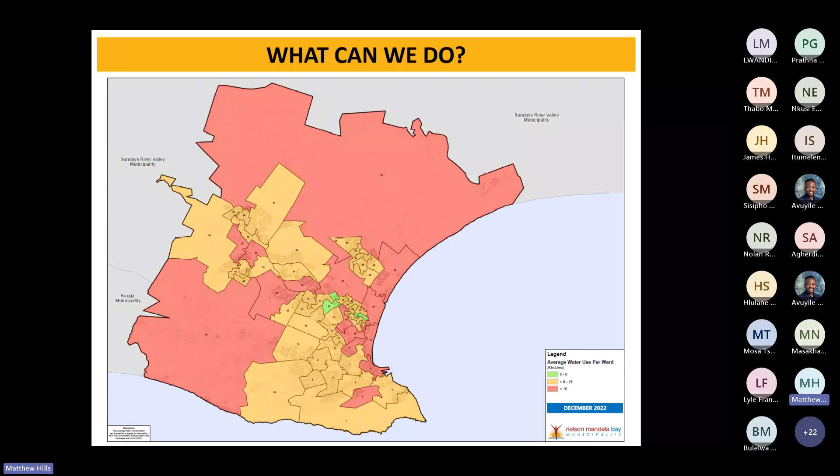So we're trying to educate our councillors and politicians as well as our general public - these are your areas, this is how your ward's performing, and these are the wards that could improve, for example. There's a new media campaign going out projecting those images, saying hey, these wards aren't behaving and these are - do something to get your name on or off each of those lists.

In the public campaign, there are a lot of little things you can do to make a difference, because it doesn't require much of a difference to be made. If we use 10 to 15% less water, which is not a huge volume, or just have a quicker shower, then we wouldn't have a demand exceeding supply scenario.

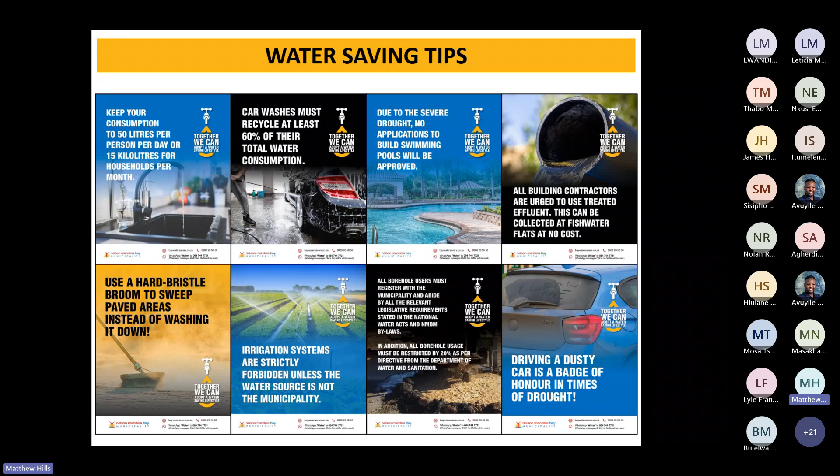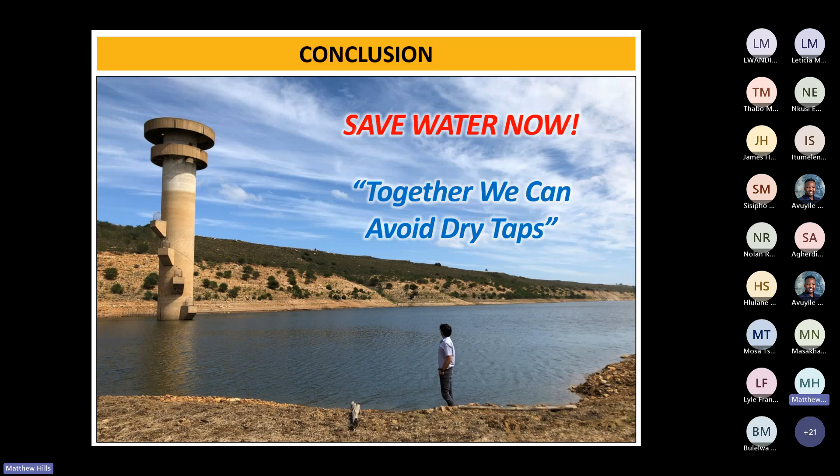This has been a huge campaign - to realize that we need to work together to avoid this dry tap scenario. It's not just a municipal problem, it's a public problem as well. Only when those two connect and are on the same page will you actually effectively get yourself through a disaster. So thank you for your patience and your time and the opportunity to present to all of you.

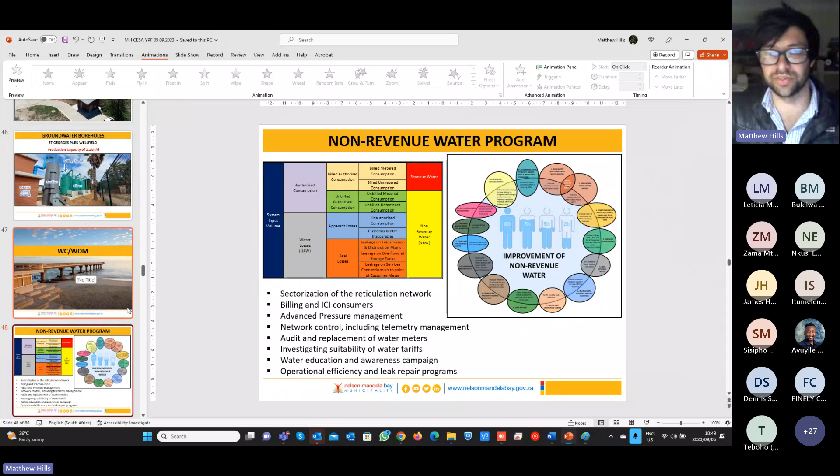Let me just share a screen again. Tebogo, I'm not sure if you were around for the entire presentation, but there was quite a large section where I showed water conservation, water demand management, and the initiatives we're taking. One of the things I tried to get across was what is non-revenue water? It's so easy to look at those percentages and think you're performing badly or well, and immediately associate that performance with wastage. You see a high percentage and think, hey, all this water is just being lost, leaked, it's unacceptable. That's not what non-revenue water is.

Non-revenue water, in its simplest definition, is the difference between what comes out of the system—what comes from our treatment works, shown on the left as system input volume—and what is actually billed at the consumer. We have about 230,000 water meters throughout the NMBM on the billing system, but perhaps one or two, or even a thousand, have been missed and aren't being read or are being estimated. So a reconciliation of our water meters is a step to take.

Second, perhaps the water meter is old and not reading accurately—the older they get, the more they underread. So we've just agreed to an investment of 208 million over the next 10 months to do a dramatic meter replacement program. Part of that will be not just at the consumer, but also at the zones, your GMAs and DMAs, so we can see what's going into these suburbs and see which ones to tackle first. But I concur with you, some non-revenue water is losses through leaks, overflows, or illegal connections of that nature.

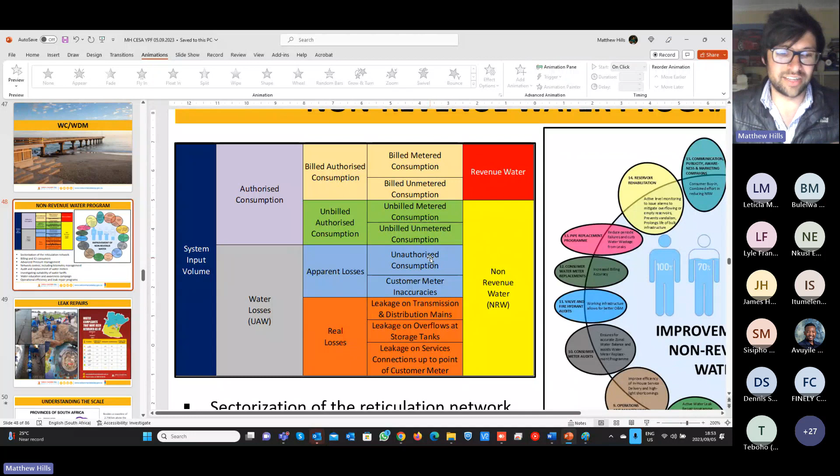To Lyle, the question was sustainability. Imperative for me before we even got off the ground was working out what flow rates we can sustainably extract so that we won't impact this resource negatively. Remember, this is not just a scheme that's going to get us through a year or two of a drought period. This is part of the permanent water supply system to the NMBM. This will make up our water mix for the next 20 or 30 years at current estimates of equipment, refurbishment, etc.

And how we do that is not only having production holes, so the four at St. George's are an example where we have constant level monitoring data and we analyze over time, is that holding stable or is it dropping? Those other 5 holes that weren't production, we make what we call monitoring holes, and within those we also have level monitoring data. And nearby users like the cricket ground, the parks, as well as the hospital, we also have probes in their holes to see if our abstraction is impacting them.

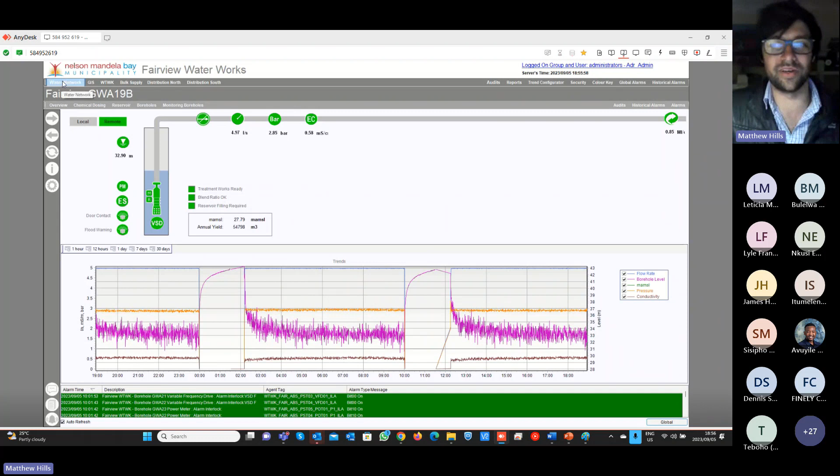What we're doing at the moment is looking at a flow set point that we constantly review and adjust. That's one of the ways we're going to understand how we're impacting the resource and if we need to make any operational adjustments. And then bringing that information into our central SCADA system, which is my pet project on the side, to bring all our operational works, reservoirs, and pump stations, all their control and information, to one centralized point which is monitored by a 24/7 operational team. From there, we can manage the system.

This is also on my phone, by the way. So in the morning, first thing I do is check how the system is operating. What do we need to change? So that's sustainability. You prove it through data and through constant analysis, and you adjust accordingly.

To Sisipho on lessons learned, just for background for everyone, that's probably the most appropriate question from Sisipho. She's taken over most of the operation of these, the well fields in particular. So what have I learned? What I do in my contracts is I have, towards the end, just before practical completion, what's called a trial operating period. It's basically a 30-day period where the contractor must successfully run the works and it must prove itself to be reliable and achieve the targets that were set for it.

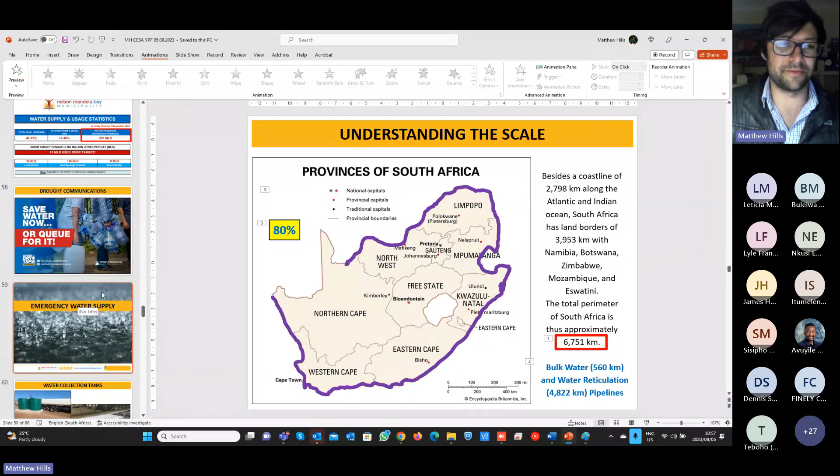Okay. We did the 30 days TOP, but I felt like we could have had more of the operational teams available and there to learn more full time, if you will, to get a better handover than simply, here's the manuals and a few days showing you around. So in future, I would make having the NMBM operating teams essential to the trial operation 30-day period.

And secondly, I've also recognized that groundwater systems are quite complicated when it comes to mechanical, electrical, electronic, especially electronic. There's a lot of sensors and stuff to ensure water quality and abstraction. I would probably build in a 6-month period after completion certificate where the contractor, not through a defects liability period, but through a set value per month, would be on standby to assist as the operation becomes the full responsibility of the NMBM. So better training before handover of our staff, or more resources available to train, and a 6-month period where you have that standby call for help should you encounter something new. That's what I've taken away from it.

To Nkusi, transmission pipelines and interconnected cities, these work brilliantly in places like Israel, where they have large cities not far away from each other on the coast. So you can have a huge desal plant and it supplies multiple cities. South Africa is large. The distance between PE and East London is significant. The distance between PE and Mossel Bay even further. The sheer energy and electrical cost alone, besides the infrastructure to be built, makes it very impractical within our country.

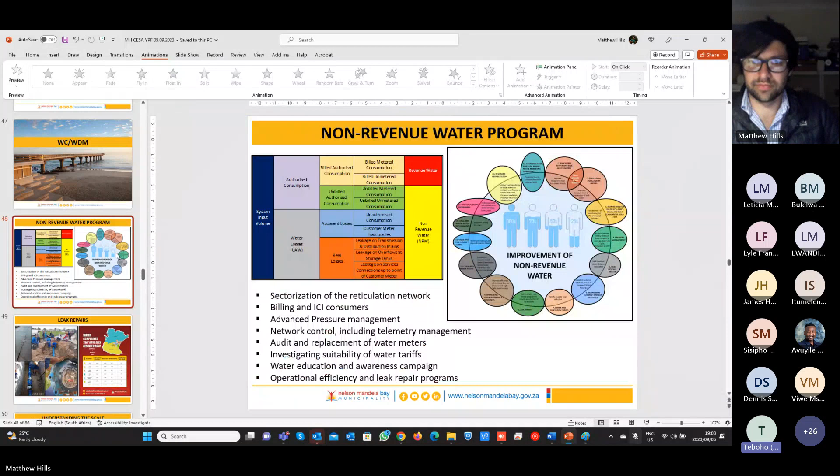So looking at Matthew's presentation, I noticed that there is a water conservation and water demand management program that is running in the municipality at the moment. And I also saw a permanent ultrasonic flow meter there in a chamber, which gave me an indication that there is continuous measurement of the bulk water systems of the city. And if that is the case, you are able to have continuous data that show the minimum night flows of each and every single supply point.

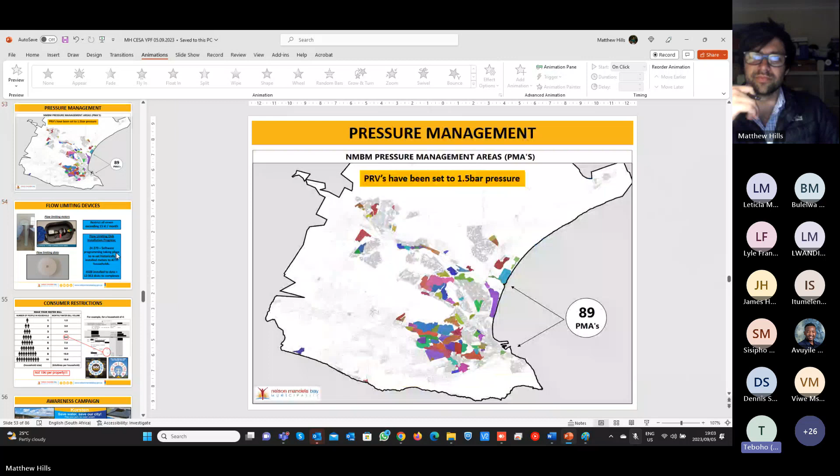That should give you a value of how much water is going through the system, and that is attached to a financial value. And from that, looking at the amount that you're losing and knowing the financial impact that it has with the real data that you have, how do you then say that we can focus on trying to recover some of the water that we are losing through distribution systems, while at the same time trying to tap into new water resources? I don't know if maybe you understand me differently now, Matthew.

Okay. No, thank you, Teboho. Matthew, do you want to answer Teboho's question, or do you want us to go to Bulelwa? Let's have the second question. All right, 100%. Bulelwa, you can go ahead. From my side, it's not much of a question per se. Thank you, Matthew, for this good presentation. But I just wanted to find out, is this document accessible? All right, thank you for that question, Bulelwa. Matthew, you can go ahead.